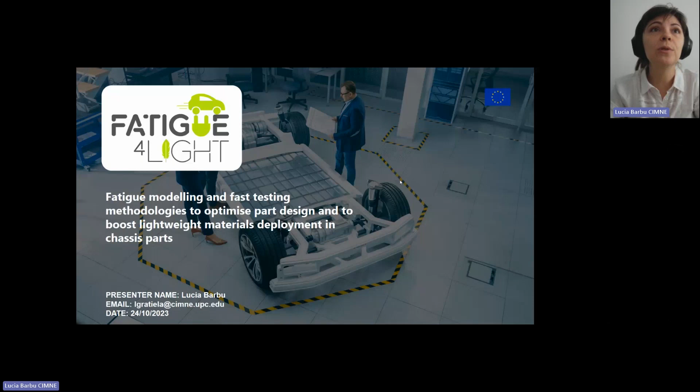As all of you know, we are here today to find out more about fatigue, and specifically in relationship to the Fatigue4Light project, which is focused on fatigue modeling and fast testing methodologies to optimize part design and to boost lightweight material deployment on chassis parts. I want to share with you several aspects of our project, among them who integrates our consortium, what are the project phases that we've been following through the development of the workflow in the project, what is the research beyond the state of the art that the Fatigue4Light project focuses on, what are the lightweight materials that we've been tackling in the Fatigue4Light project for applying on electric vehicle chassis parts. And at the end, I would say a brief overview, because the time is very short, on several results that we have achieved in the project, just to create a little bit of hype and maybe ramp up your interest, so you can join us in future events organized by the project.

Okay, so as a general overview, Fatigue4Light is a Horizon 2020 project. We've been funded by the European Commission with nearly 5 million euros to work during 3 years. We started in February 2021, and we will be finishing this next January 2024. So we are close to the end of our project.

We've done a lot of work these 3 years, and we are very happy to share that work with you today. The consortium is formed by 14 different partners. We've joined together from 4 different European countries. And the coordinator is CIMNE, the International Center for Numerical Methods in Engineering, the institution that I'm representing today in front of you.

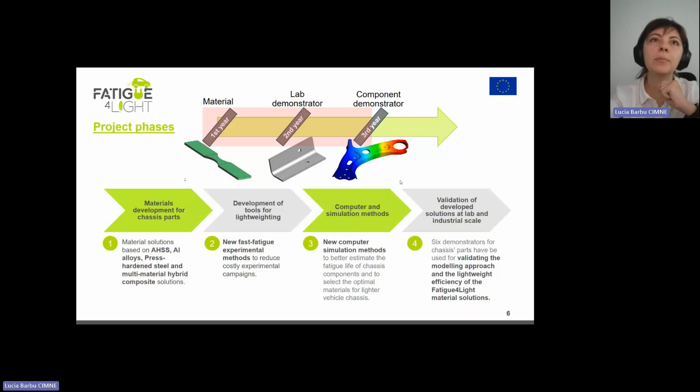And what are we doing in the Fatigue4Light project that is beyond the state of the art? Well, we have a comprehensive modeling approach where we are focusing on evaluating the fatigue performance of the different materials we have analyzed in the project. But it's not enough, as is habitually done in the state of the art in fatigue nowadays.

It's not enough to only look at the fatigue behavior if you don't analyze the whole history that material or component has passed through. What do I mean with this? When you are manufacturing a specific chassis component, there are several manufacturing processes that are going to induce some nonlinear effects on your component, on your material. And many different types of manufacturing processes can be used.

We've analyzed several of them in our project. I would say that one of the main advances beyond the state of the art is following this comprehensive approach where we monitor damage and plasticity induced due to the manufacturing process—stamping, cold forming, punching, welding—and we take into account these nonlinear effects and extrapolate them, or use them to affect the fatigue performance later on of those components manufactured in that specific way. So this is what I mean with the comprehensive approach, okay?

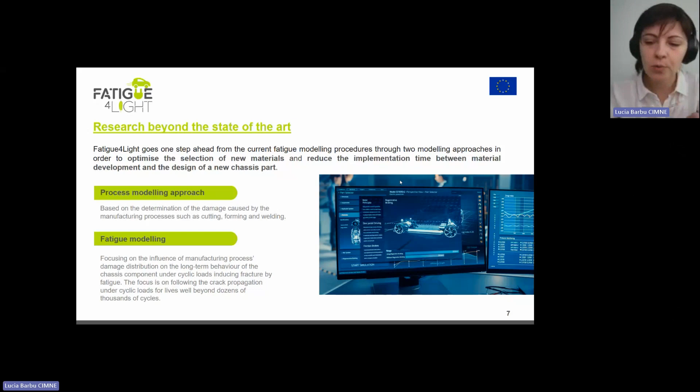Now, what are the materials that we have studied in the project? As I was mentioning, we have advanced high strength steels, basically CP800 for applications where it is not the current state of the art, and also CP980 or CP1000 for applications where we want to push forward the state of the art. They are currently manufactured with CP800, and we want to take them further to CP980.

Hybrid materials and stainless steels are also a different avenue that we've focused on in the project. This is metal composite sandwich material, where the outer layer was made of aluminum alloy and the inner core was made with glass fiber reinforced polymers. We also studied stainless steels, new martensitic stainless steel, which were adapted for press hardening. Then a different avenue has been studying advanced boron steel developed for press hardening of thick sheets. These are chassis components with quite high thickness, and these press hardened steels have good fatigue resistance, which is why we chose to study them in the project.

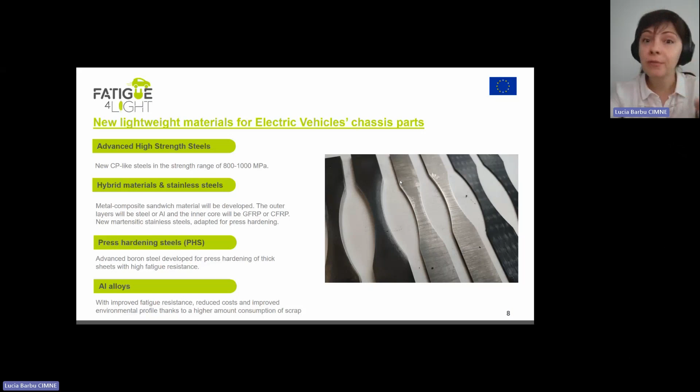And of course, aluminum alloy, as I mentioned, is involved in the hybrid solution. We chose the aluminum alloys which have improved fatigue resistance. There are some benefits when you use aluminum alloys, such as reduced cost and improved environmental profile, because they have a high content of recycled material.

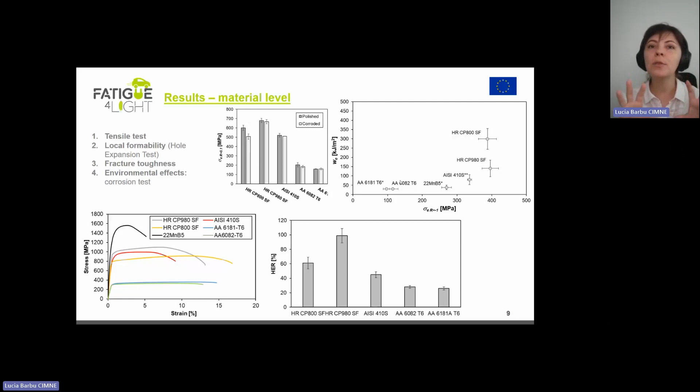Now a brief overview of the results we obtained in the project. In the first year we devoted a lot of time to a very intense experimental campaign where we compared the behavior of the different materials through different types of tests—here you can see four of them. The tensile behavior was very important for us. Local formability was also studied by means of a hole expansion test. Then we looked at the fracture toughness of the different materials and also some environmental effects studied through a corrosion test. Since I don't have a lot of time today, I just put here a snapshot of how these different materials compare in these different tests.

But I would say for us, the most important analysis was studying the fatigue behavior of the different materials in our project. We followed different avenues for studying fatigue behavior. Of course, we went through the conventional staircase method, the one that is time lengthy and cost consuming, as you know. We also studied several rapid testing methodologies, which is what you will hear about in the later part of the webinar—the self-heating method, the stiffness method, and also Politecnico di Torino did some tests on very high cycle fatigue method using an ultrasound machine.

I won't go into more detail here because my colleagues at Eurecat are going to present later on their stiffness method, and ArcelorMittal is going to present their self-heating method. So it makes no sense for me to insist here.

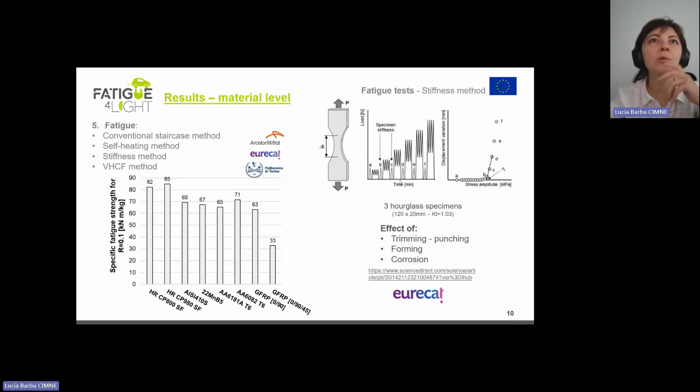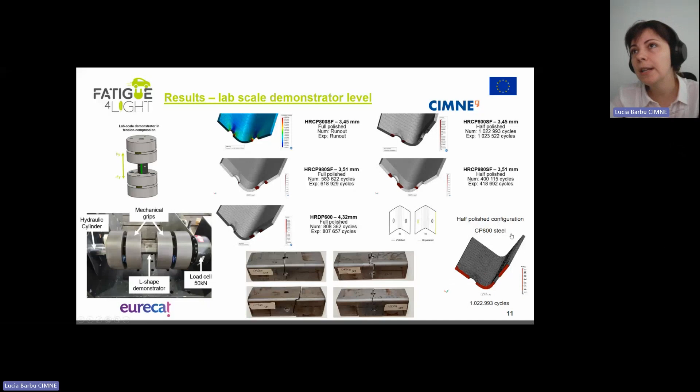Second year of the project, results at lab scale demonstrator level. We've chosen an L shape for our laboratory demonstrator. On this shape, we wanted to investigate the effect of having polished edges and polished holes throughout the whole geometry, or leaving some parts unpolished, just to study the effect of this surface treatment on the fatigue behavior. You can see here different types of fracture obtained in the laboratory by the Eurecat team, and also different types of numerical results we've obtained at CIMNE, with very good correlation between the experimental and numerical behavior. You can see a small snapshot of crack propagation for one of the profiles done in CP800 steel. Okay, let's move on.

Results at demonstrator level—here I want to speak about the steel lower control arm. We've analyzed this lower control arm geometry, and we focused in our project on three different material solutions which were interesting to explore for this geometry. One of them was a steel version, manufactured in complex phase 980, the CP980.

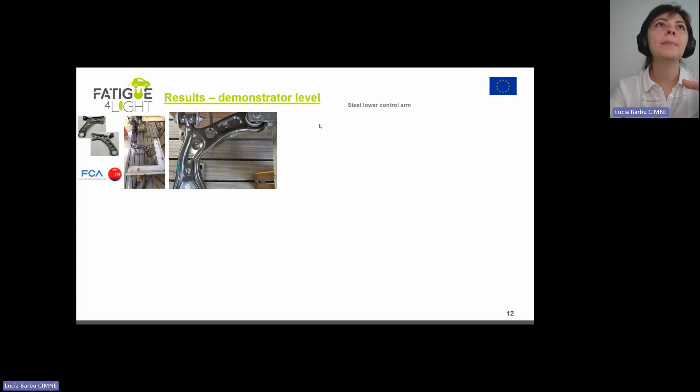Here you can see an image of the failed component under the monotonic test, and some images from the modeling campaign, both from CRF side and CIMNE side, of this misuse case, as we call it. Work for the cyclic part is in progress right now, and we will show it later if you join us in future webinars.

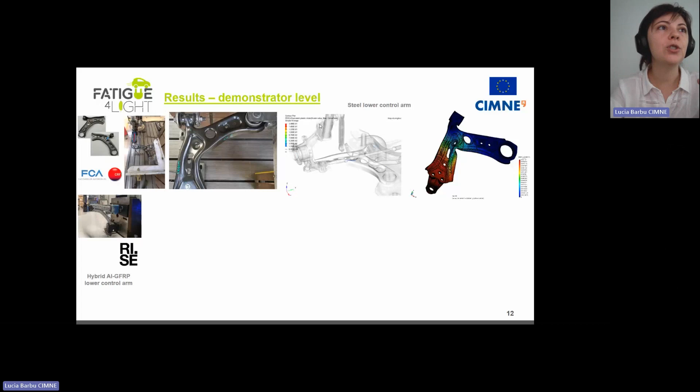Now about the hybrid aluminum GFRP lower control arm, this was a different version of this geometry. It was manufactured and tested at RISE, and you can see some images of the test being performed, and also an image of the failed specimen, again in the monotonic regime.

From CIMNE side, we were also involved, and we are continuously doing the modeling for this geometry. You can see a preliminary approximation we obtained between the numerical result and the experimental result, at least for the elastic part at this point.

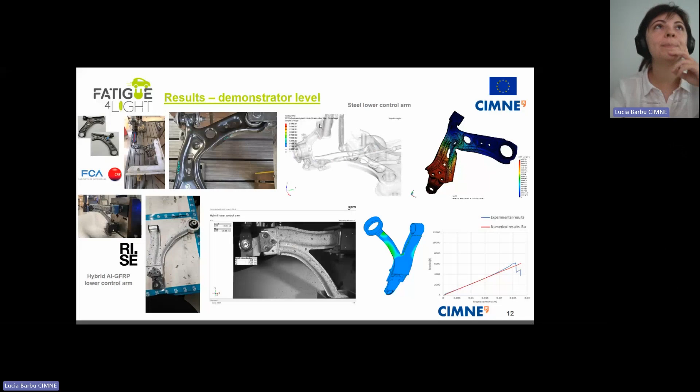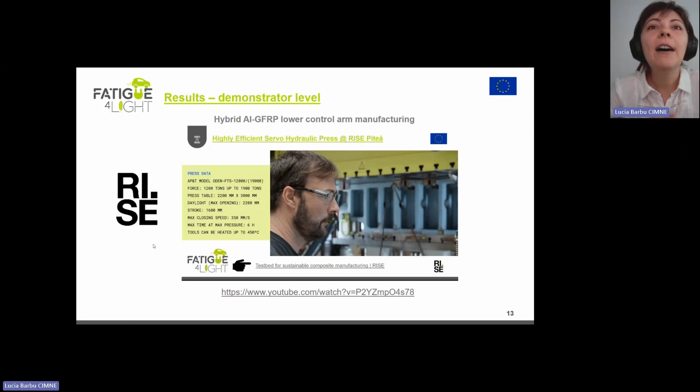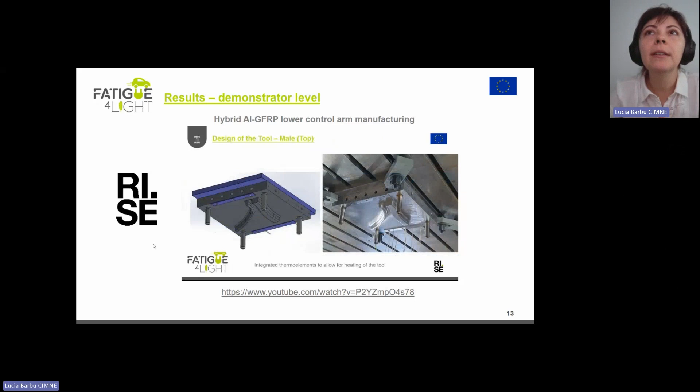I want to show you just a very quick, nice video, and you can go to YouTube and watch it, of how the hybrid arm was manufactured. This is work done by our colleagues at RISE, and it's super interesting because they created the tool also for manufacturing the component.

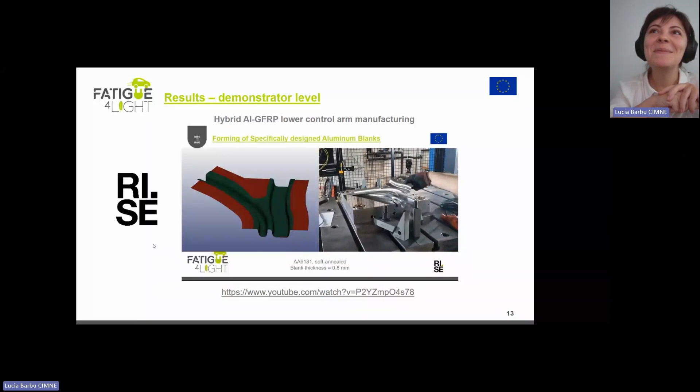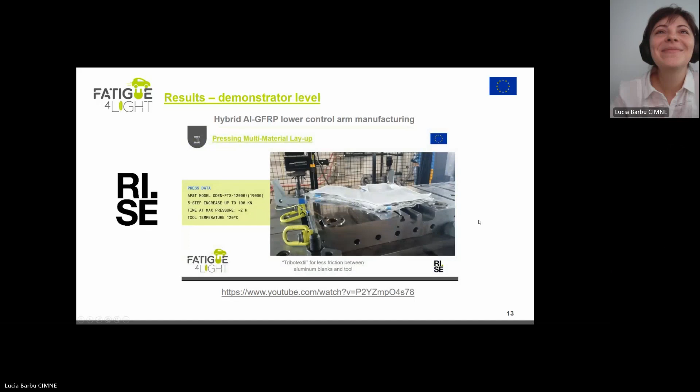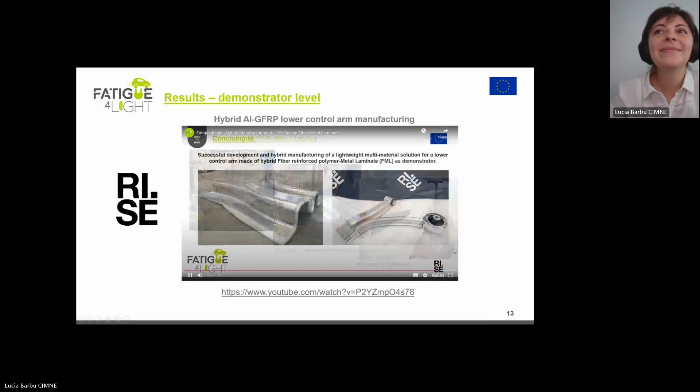At the same time with the manufacturing, there was a numerical analysis conducted to make sure everything would end up well manufactured. And this is the final view of the demonstrator, ready for testing.

Let's go fast because I don't want to lose more time. We have 2 demonstrators left in our project. One of them is the wheel, which Maxion Wheels will present later on, so I didn't dedicate any time in this presentation. The other one is the cross-member beam, which was proposed by Gestamp Hardtech.

It's a beautiful process. Now, the geometry that was manufactured with this process was later screwed to a testing bench, and some cyclic displacements in different directions were applied to this geometry.

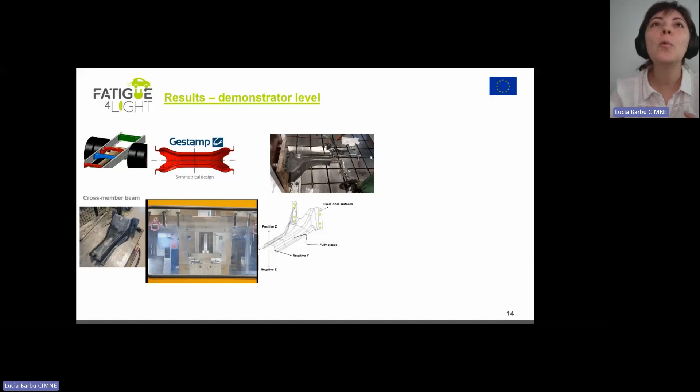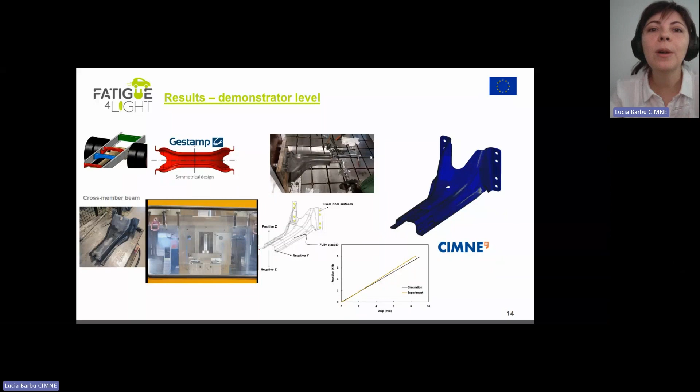From the numerical side, we've also investigated the performance of this geometry. At the moment, we are again only working on the monotonic side, with the cyclic part to be performed during this month and next month. The results are quite interesting and promising at this point.

What about the eco design assessment? A big part of the project has focused, of course, on the mechanical performance of these different materials at different scales. But eco design aspects are an integral part, a very important part of our project.

On this part, we've worked a lot to rank the performance of these different materials through different aspects: sustainability, recyclability, end of life aspects, in-use energy consumption, etc. And all of these aspects need a lot of time also to be explained.

So I won't have time today to share them with you, but I wanted to create a bit of interest. So please join us in future webinars of our project and follow us, because we will publish a lot on the results obtained in this part in the following period.

Please, Sergi, go ahead. Thank you, Danny, for the introduction. Yes, as mentioned, I will start with the first method that we developed here in the Fatigue4Light project.

Just to have an overview of the situation in electric vehicles: probably most of you already know that the weight of the electric vehicle, due to the battery, is increased by about 15 to 40%. So there is a need to reduce the weight of the electric vehicle and keep it low, as low weight means higher range and also a safer vehicle.

If we want to reduce the weight of the vehicle, there are different strategies developed for the body in white and so on, such as reducing the thickness of the material. But here in the Fatigue4Light project, as already mentioned, we address the chassis of these vehicles. The aim is to reduce the weight of the chassis by about 20 to 30%, which means 12 to 15% of the weight reduction of the structural weight of the vehicle.

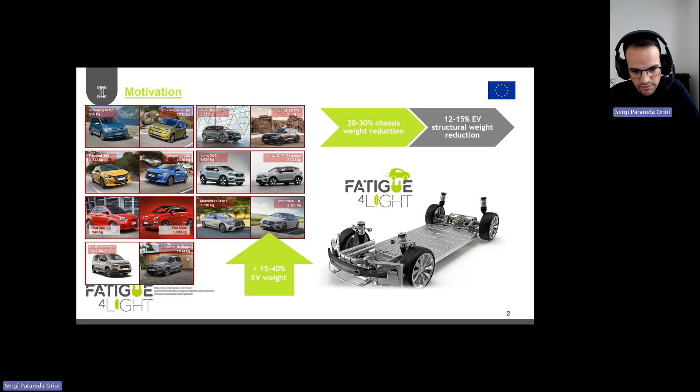But if we want to address this lightweight design, we should consider two main properties. When talking about components like the lower control arm that Lucia showed, or the chassis of heavy-duty vehicles, we have to consider the fatigue properties due to the cyclic loads applied in the chassis during utilization of the vehicle, but also, for metallic materials, we have to consider formability.

The conventional approach is to use conventional or advanced steels, but the main strategy is to move to advanced high-strength steels to obtain this lightweight design - materials with higher tensile strength, which is usually related to higher fatigue resistance, while keeping or improving the elongation of the material to obtain good formability, allowing complicated component shapes and further reducing the weight of the components and the vehicle.

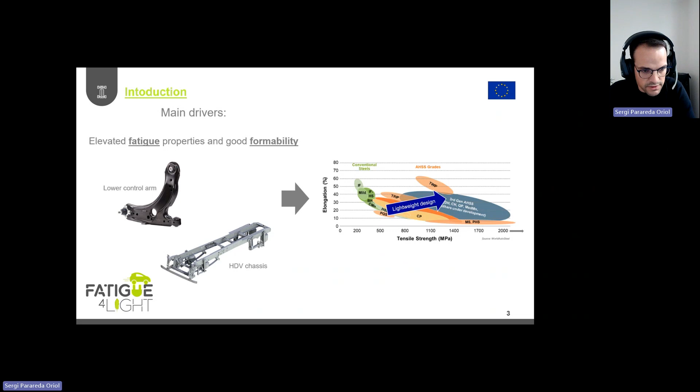But fatigue is a difficult and complicated issue, governed by the weakest link. Many different parameters can affect fatigue: the material itself, defects found on the surface due to roughness, joints, or even the component design, where stress raisers or irregularities can compromise the fatigue resistance of the component.

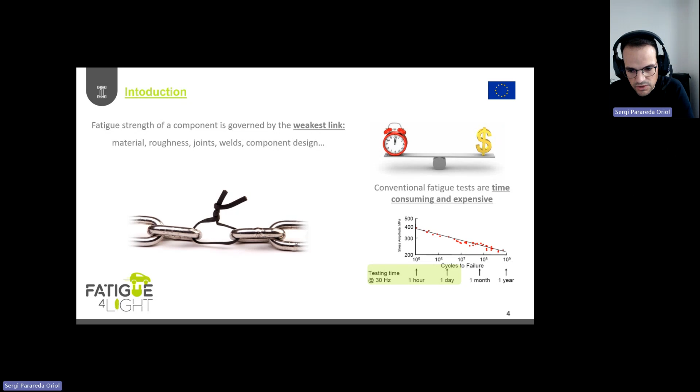So in order to properly design these components, it's interesting to characterize the material under these different conditions. But, as already mentioned, fatigue tests are time-consuming and expensive, so there is a need for new strategies to reduce the testing time.

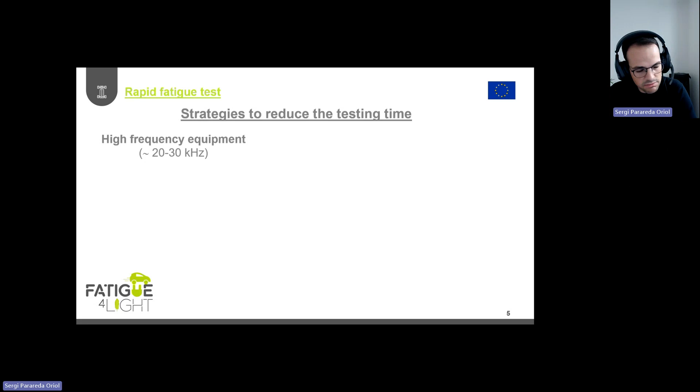As Lucia mentioned, here in the Fatigue4Light project we have two strategies. One is to use high-frequency equipment, reducing testing time by increasing the loading and unloading frequency of the specimen - in this case we can reach up to 20 to 30 kilohertz, a huge reduction in testing time. The other is to use a loading block sequence.

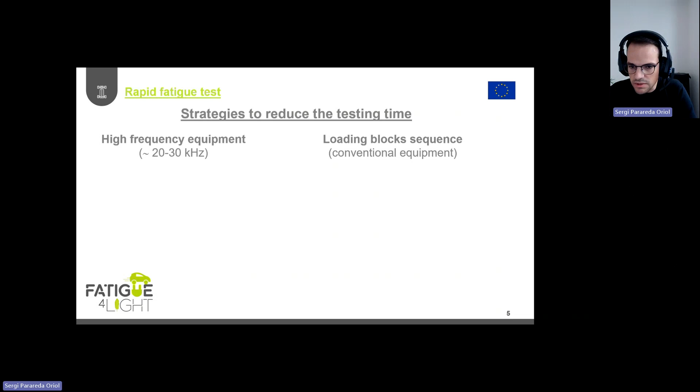The good point of these strategies is that we can use conventional equipment, such as servo-hydraulic machines common in all laboratories, along with extensometers and other common equipment. But if we want to use this new approach with loading blocks, we have to consider different points for it to be accepted and used in different labs.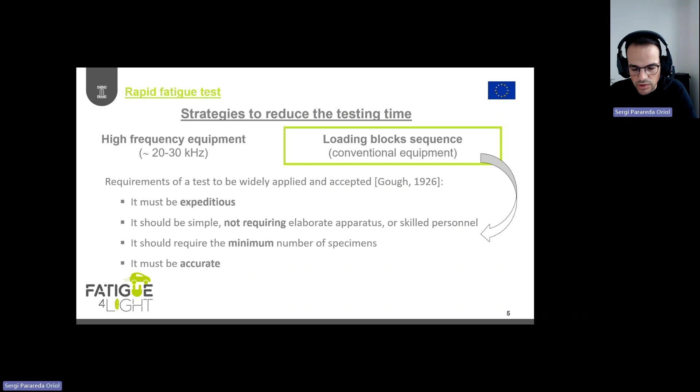As an earlier researcher mentioned, the test must be expeditious, simple, require a minimum number of specimens, and also be accurate. Keeping all of these points in mind, we developed this stiffness method here in the Fatigue4Light project.

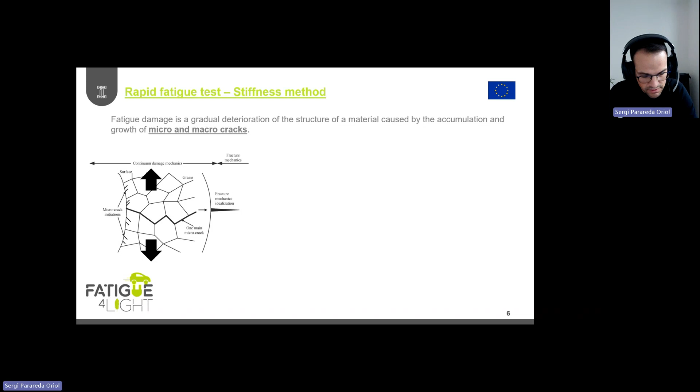The method basically tries to monitor how the damage evolves in the material, from an initial state where we have no cracks or damage, to the development and growth of micro and macro cracks. Here is a schematic graph of how the fatigue damage evolves in the material - we have micro cracks that then coalesce, forming a macro crack.

The idea is to monitor this damage evolution by measuring the strain while applying a defined load sequence, which we will see later. In this case, we can easily identify the elastic stress-strain behavior where no damage occurs due to fatigue.

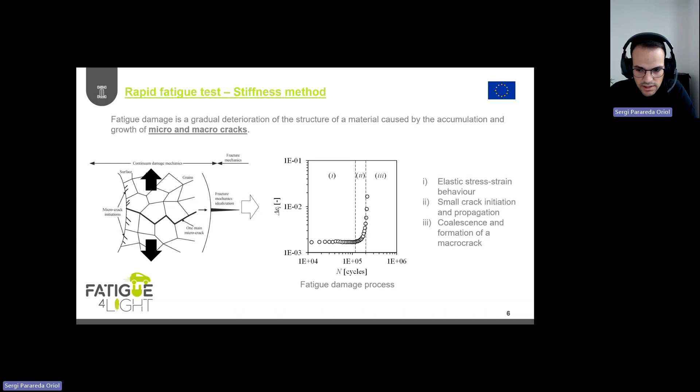Then we have this second stage where we have small crack initiation and propagation, and finally we have coalescence and formation of a macro crack. So the main idea of the stiffness method is to monitor this fatigue damage by

measuring the strain at a given or at a constant stress value. So as you can see here in the left-hand side, we are measuring the strain for a given stress, in this case, the half of the yield strength. And then we are applying some fatigue cycles, and we are measuring once again the strain for this stress level.

And then we increase the stress, the fatigue stress, and we apply more blocks. So at the end, we have, until we reach the fracture of the specimen, this evolution of the strain against the stress for each one of these fatigue blocks.

So by plotting in the right-hand side of the slide, you can see the plastic strain, which is related with fatigue damage, against the maximum stress of each one of these fatigue blocks. And in this case, we can clearly see how the strain is evolving. So the fatigue damage is evolving at a given stress value, and this stress value is the fatigue limit of the material.

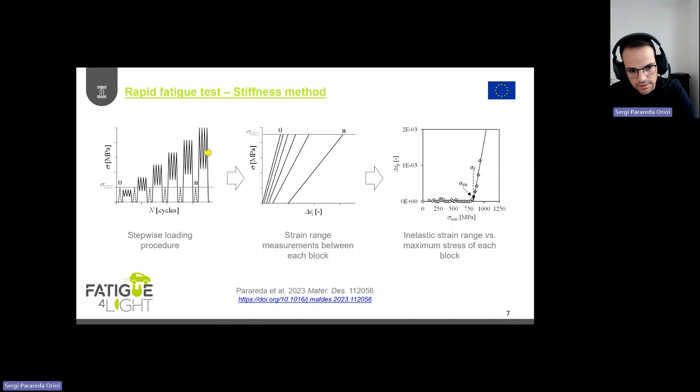So the good point is that since we are monitoring the fatigue damage, we can not only define the fatigue limit, so we can also define the slope of the SN curve. So we can obtain a complete characterization of the fatigue resistance in a short time.

So here, just to show a little bit the results, we tested 3 different materials, the dual phase material, which can be considered as a reference. And then we tested 2 CP steels, complex phase steels, the stress ratio of 0.1 by controlling the stress.

We monitored the strain by using a DIC system that you can see here in the left-hand side of the slide. We used a common load frequency of 30 Hz, so a common frequency of an SN curve, for instance, or a staircase testing, and then a block length of 6,000 cycles, so the length of each one of these fatigue blocks that you can see here in the middle of the slide.

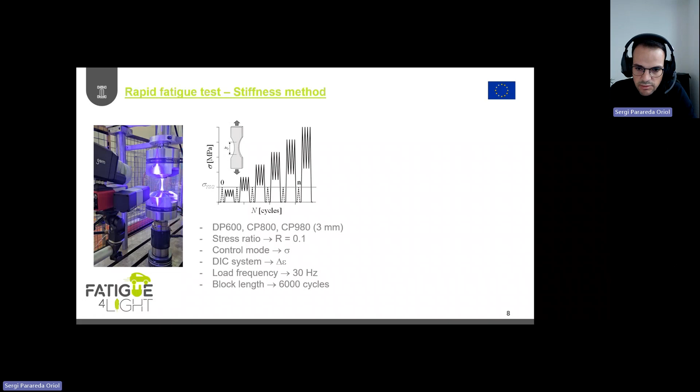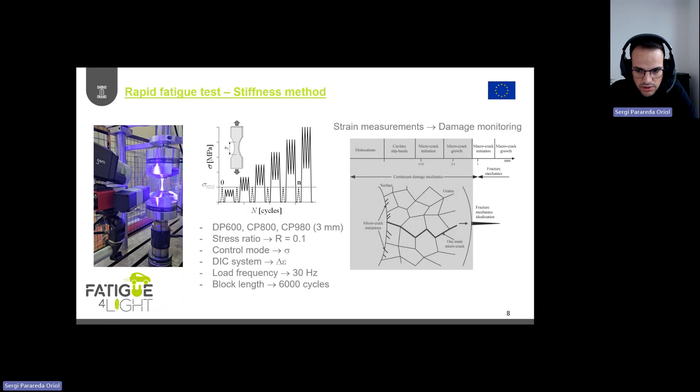And then, well, we measured it, by using this strain, we monitor the fatigue damage that is evolving in the material, and we focused on this first regime, which belongs to the continuum damage mechanics.

So here you can see some results that we obtained for these 3 materials, and also here you can see the results for different edge conditions. So when we are talking about different edge conditions, we mean that we have the hourglass specimens, for instance, and we polish the edges. So this is the polish condition.

But then also we included the trimmed condition. So we mechanically sheared the edges, and we obtained the well-known edge shape where we have different defects and so on. And we tested all of these different conditions for the different materials. The good point is that we can obtain the results in 2-3 hours per specimen.

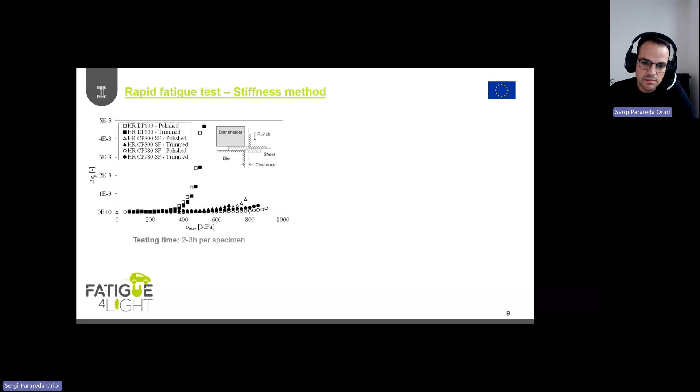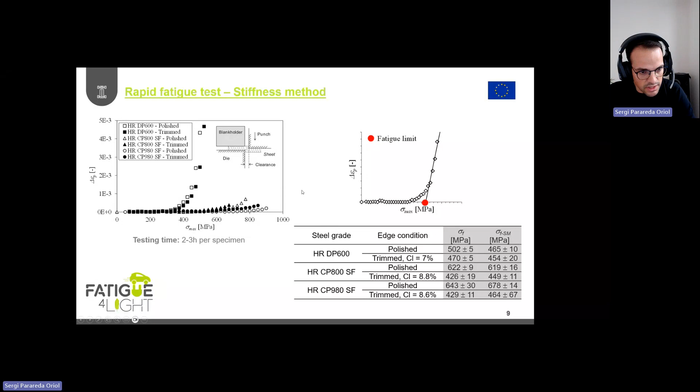So the good point, as mentioned, is that by using these methods, we can determine the fatigue resistance, the fatigue limit, but also the slope of the SN curve of different materials, but also by considering different effects. So the microstructure of the material, some defects, forming effects.

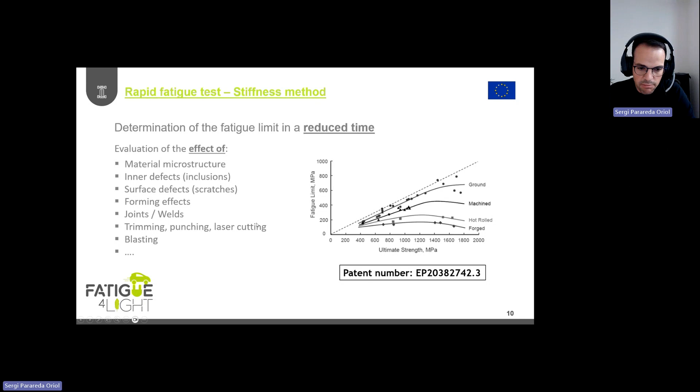We also evaluated this point of the forming effects in the project. Yes, the trimming and punching, as mentioned. And the point is that if we are able to use this technique together with other approaches, that results in an even more powerful tool.

So, for instance, here we have these 2 specimens that I showed, so that corresponds to the previous results for the polished and trimmed edges. And here what we can do is relate this different behavior to the damage tolerance of the material.

So also in the Fatigue4Light project, we developed a new approach where we can relate this reduction of fatigue with the fracture toughness of the material. So for some materials, for instance, in this case, for the DP material, the fatigue resistance for the polished and

trimmed condition was almost the same. So there was no reduction or significant reduction. So in this case, we have this KF factor close to 1. So the fatigue resistance was the same. But then for other materials, we had a higher, or a notable, let's say, fatigue strength reduction.

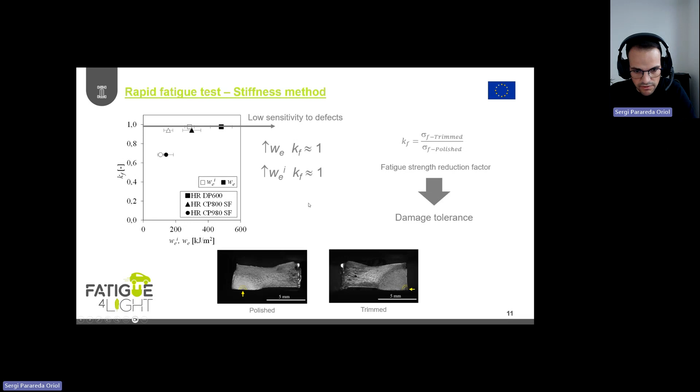And for instance, for this CP grade, this might be related with the fracture toughness of the material, since fracture toughness is related to the damage tolerance.

So here, as mentioned, this is the tool that I mentioned. Here we can plot the fatigue resistance for the polished conditions obtained by the stiffness method. We can easily obtain this data in 2 or 3 hours, and then we can also plot against the fracture toughness, which can also be obtained in a short time.

By plotting all of this data, we have a chart to select the best materials for a lightweight design of a chassis component. We define a window, let's say, for materials with high fracture toughness and good fatigue resistance. This is relevant since, when polished, everything in the lab is fine, but in the real part we have defects that can compromise the fatigue resistance of the component.

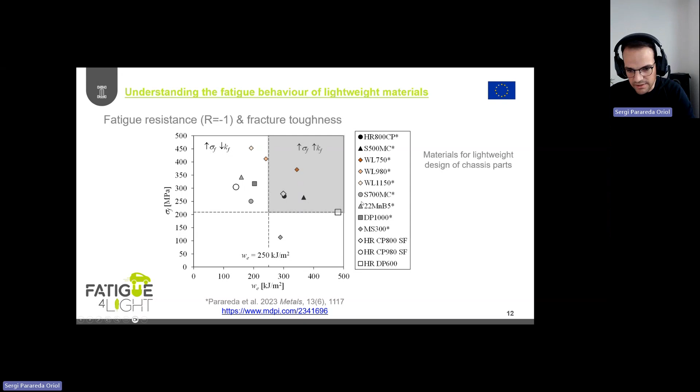And this is all from my side. Thank you very much for your attention, and I will be happy to answer questions afterwards. Thank you.

Yeah, I think you can see my screen. Thank you for the introduction. Sergi made a short presentation, an introduction to fast testing methodology, and today I wanted to focus on self-heating measurements.

Surprisingly, it's not something new. This method has been developed more than a century ago. During cyclic loading, Stromeyer observed that during fatigue testing there was an increase of temperature under cyclic loading. He determined, with a device he developed specifically for the test, that the temperature elevation was directly linked to the appearance of fatigue. So the self-heating measurement was born.

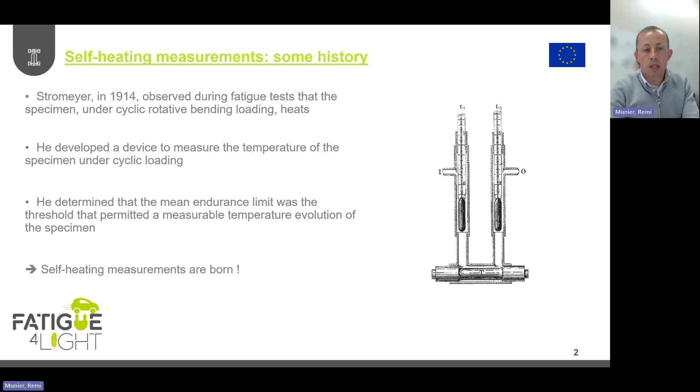Then the idea is to measure during the test the temperature evolution of the specimen under cyclic loading, just as Stromeyer did more than a century ago. And then the idea is to directly link this temperature evolution to the fatigue properties.

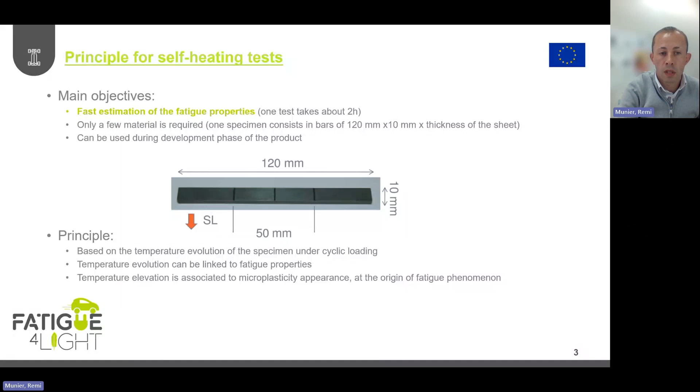For one test, the configuration uses 1 specimen, and we need 3 thermocouples. 2 are fixed on the grips of the servo-hydraulic machine, just to measure the temperature evolution of the system and of the environment during the tests. And then 1 thermocouple is fixed on the specimen.

As we are performing self-heating tests at a load ratio of -1, we need an anti-buckling device to avoid buckling under compressive load. According to the geometry of the sample, where we can consider that the temperature is quite homogeneous in the useful area, we can reduce the 3D heat conduction equation to only 1 adimensional 0D heat conduction equation, directly linked with the temperature evolution of the specimen, and with ED, a term devoted to the appearance of microplasticity, and then to fatigue properties. So we can directly link these 2 parameters: the temperature evolution and the dissipated energy at the origin of fatigue phenomena.

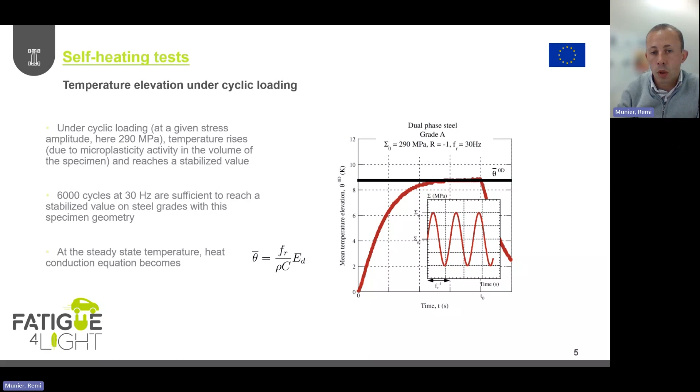Then the principle of the test under cyclic loading: here you can consider only one cyclic loading at a loading frequency, quite the same conditions that Sergi is using for the stiffness method, a frequency of 30 Hz, a load ratio of -1. Then we can observe during cyclic loading a progressive elevation of the temperature up to a stabilized temperature, which is measured for each cycle.

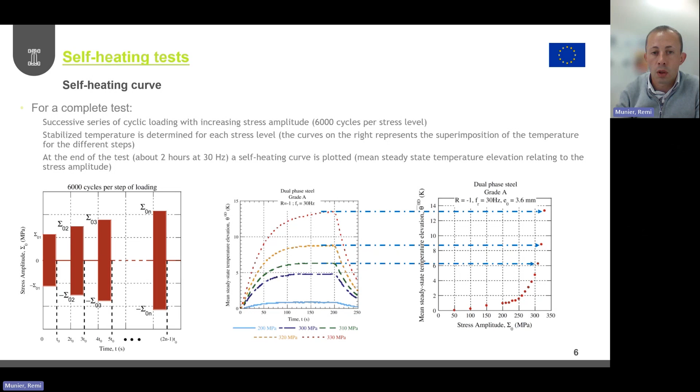And then we measure the stabilized temperature, which permits us to plot, on the right, what is called a self-heating curve, representing the evolution of the temperature of the specimen according to the stress amplitude. Okay, so we have one curve. So what can we do with this curve?

First, as Stromeyer used more than a century ago, the idea is to use some kind of deterministic approach to determine an estimation of the mean endurance limit at 2 million cycles. Here we consider for the test that the intersection between the axis and a straight line, taken as an asymptotic behavior of the self-heating curve, is the mean endurance limit. Over the years, we have tested many metallic materials, many aluminum alloys, and we know the method is quite accurate for these grades, but only a few composites have been tested.

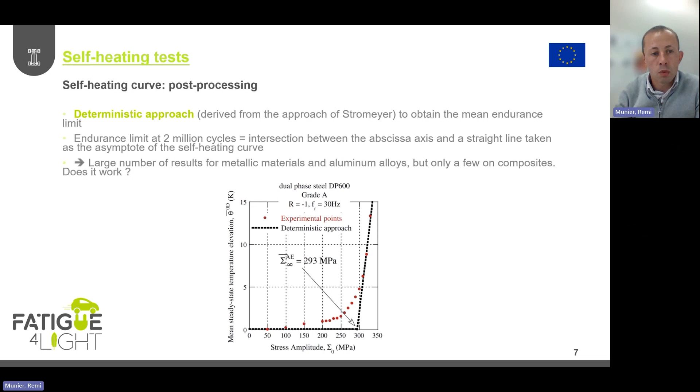So one of the ideas also was to test if this method was relevant. Then for a second approach, we can use a probabilistic model, because as we know, fatigue is a dispersive phenomenon. Having information about the endurance limit is good, but we also need an estimation of the standard deviation according to fatigue tests.

So for metallic materials, we developed a two-scale probabilistic model representing a progressive appearance of microplasticity. Then we can completely describe a self-heating curve for low regimes of temperature and then for high regimes. So the temperature evolution of the specimen can be decomposed into two contributions: one not linked to fatigue properties, at low stress amplitude, and one directly linked to the evolution of microplasticity inside the volume.

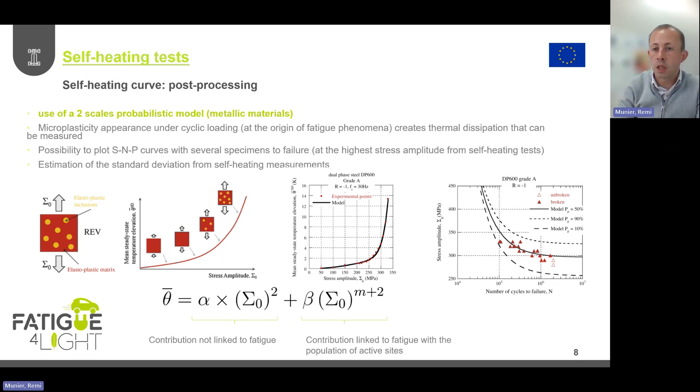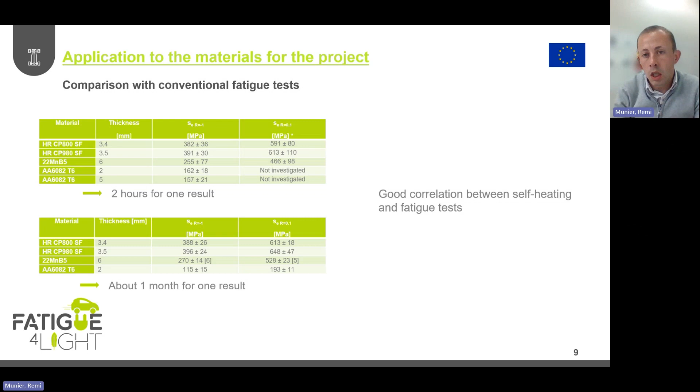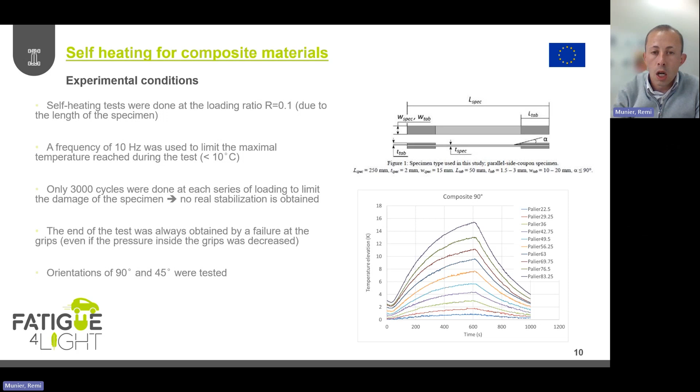There was a need to change a bit the conditions for the test, to reduce the frequency, just to be able to not overheat the specimen. We also needed to reduce the number of cycles to reduce the damage on the same specimens, but then we were able to obtain one self-heating curve, which is quite strange here in the results.

I showed before that the temperature evolution could be a contribution of two regimes. For composite materials, only one is observed. It's always a power of 2 of the maximal stress according to self-heating measurements. But as for metallic materials, we asked, why not use the same empirical approach to determine what could be considered an endurance limit, dedicated to the progressive appearance of the temperature?

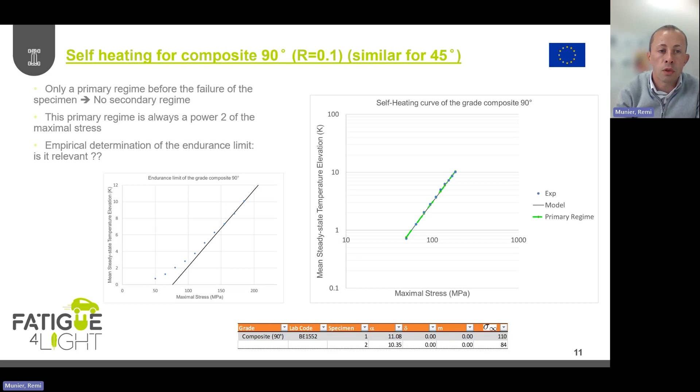So is it relevant, right? Because here, even if we don't have a secondary regime linked to fatigue properties - since fatigue properties are not similar, it's not the same model, we cannot use the same approximations - you can see on the right, in the middle of the table, and then on the bottom with the left column, that fatigue is quite relevant with the progressive evolution of the temperature. And that's despite the fact that the model is not fully appropriate, because here we can consider only one regime.

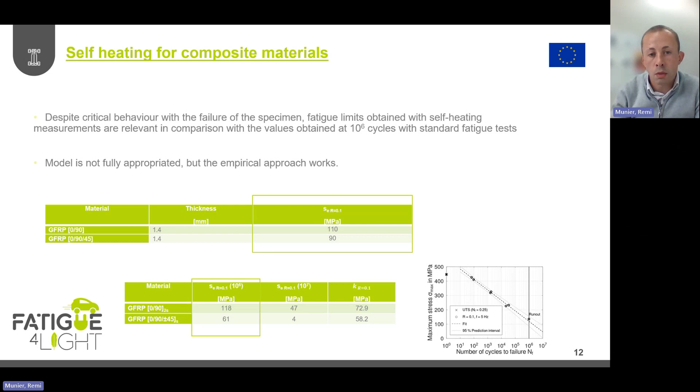But here for composite materials, as we can deal with the weakest link theory, we know that when one fiber breaks, it will cause the failure of the entire specimen, and here it's what's occurring with a limitation of the value. So we can have good results for one orientation of the fiber. For the other one, there was an increased error, but we can say that this method, as a first attempt, was quite relevant also for composite materials.

To conclude, self-heating was used for the rapid determination of the endurance limit. One of the biggest advantages of the method is the reduced time compared with conventional fatigue tests. As I said before, there can be some mistakes and limitations, but for bare materials with a homogeneous volume, this approximation is quite good.

Especially for metallic materials across a wide range of ultimate tensile strengths, there is also good agreement for aluminum alloys, even at a loading ratio of -1. The estimation of the mean endurance limit is quite good, and we also have an estimation of the standard deviation.

This is a good thing in terms of fatigue design for the model. We also tested composite materials, and we showed there was only one primary regime. When there is progressive appearance of microplasticity, it directly leads to failure of the specimen, and the estimation is quite good also for the mean endurance limit.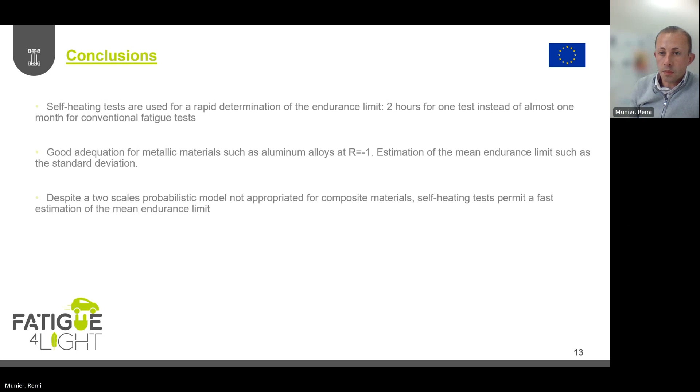I haven't presented the result here, but when we compare the self-heating method with the stiffness method for CRG, we get quite similar results. Okay, I think that's it for my presentation.

A brief introduction of MW. MW is a division of CLN Group, and it is a steel wheel maker, leader in the sector for passenger car and light commercial vehicle. MW's contribution to the project, Fatigue4Light, is to study high-strength steel in order to improve the fatigue performance of the wheel.

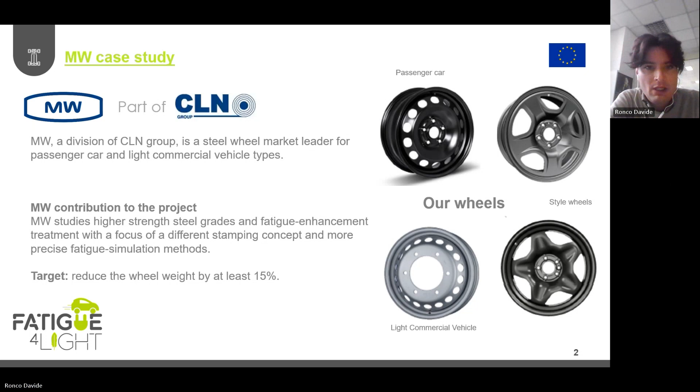The target is to reduce the wheel weight by 15%. What was the MW strategy for this European project? At the beginning, we made a pre-screening fatigue test in order to evaluate which material can be suitable for our needs.

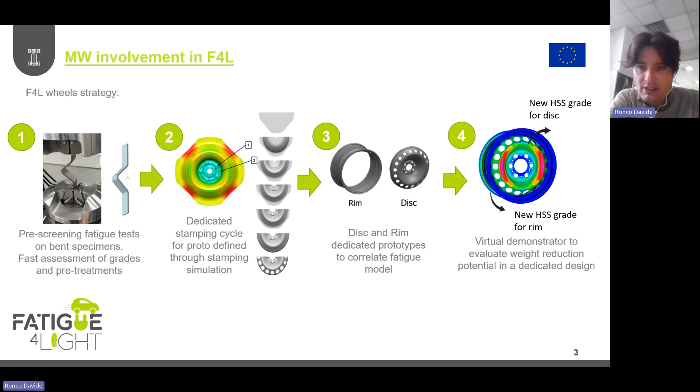When we defined the correct material, we studied dedicated stamping cycles and a dedicated stamping sequence to produce parts with this new material grade. We prepared the samples and prototypes, and correlated the fatigue model. Then at the end, we created a virtual demonstrator with all the concepts and characteristics we studied during the Fatigue4Light project, including this innovation, with the scope to reduce the wheel weight by 15%.

At the beginning, as I said, we studied the material on specimens. We started from the flat specimen. Here in the picture is not exactly the specimen we used, just to show the difference between the first type and the specimen we used, this 'dogbone' specimen.

We studied the fatigue performance of DP600 material, which is the material we normally use for the wheel, and also other materials: HSLA700, DP800, and CP800. Then we reproduced the fatigue test with this special specimen.

This special specimen has two important features. First, it is bent, so inside the specimen we include also the hardening phenomena we have, for example, when we stamp the wheel. We also convert the stress from pure traction and compression stress, as in the flat specimen, into a bending stress, which is what we have in the fatigue test on the wheel.

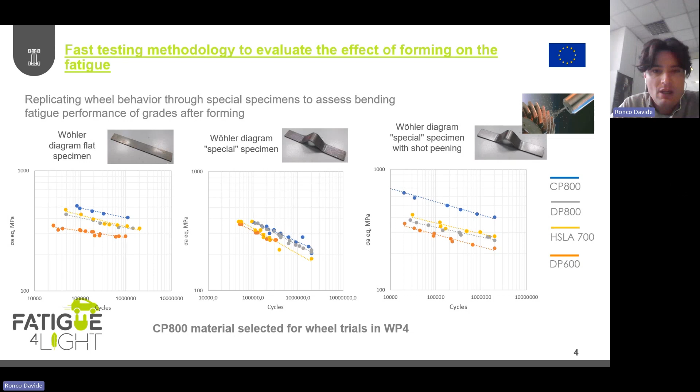After this test, we selected the CP800 material as the new material to start with, instead of DP600. Sorry. Okay.

This part we selected two different case studies. The first reference is for the disk, the internal part. Usually this wheel has a disk of 4.3 millimeter DP600, and we produced some samples with 3.7 millimeter CP800.

The second case study is for the rim, the external part. Usually this part in that wheel is 3.5 millimeter, and we pass to 3 millimeter CP800.

After the case study definition, we performed the stamping simulation in order to identify the better sequence to stamp the CP800, because its characteristics compared to the DP600 are different. We created a dedicated tool, and in our plant in Romania, we produced the parts in different campaigns.

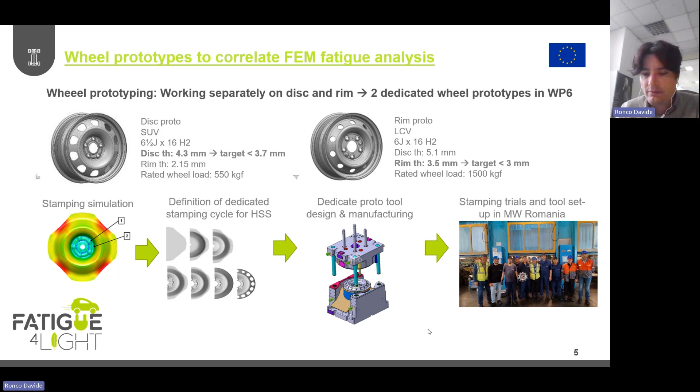This permits us to reach the goal, because we have a solution that is 0.6 millimeter less in thickness, reducing the disk weight by 15%, giving us a lighter solution.

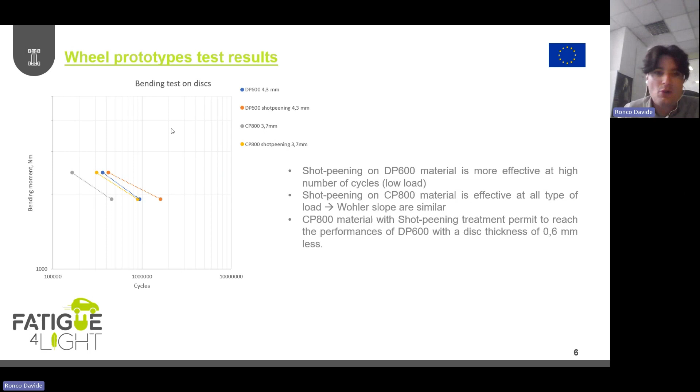After the disk, we tested also the rim. The tests for the rim are not yet finished 100%. In any case, on the rim the situation is a little bit different: the 3 millimeter CP800 compared to our normal rim in S235 JR has lower performance.

But we can say that with this material, we cannot reduce the weight and thickness by 15%, but by 7.5%.

One thing I would like to add is that these tests were done without shot peening. For the moment, shot peening on the rim was not investigated. So probably with shot peening, the performance can increase, and we can reach also for the rim the 15%.

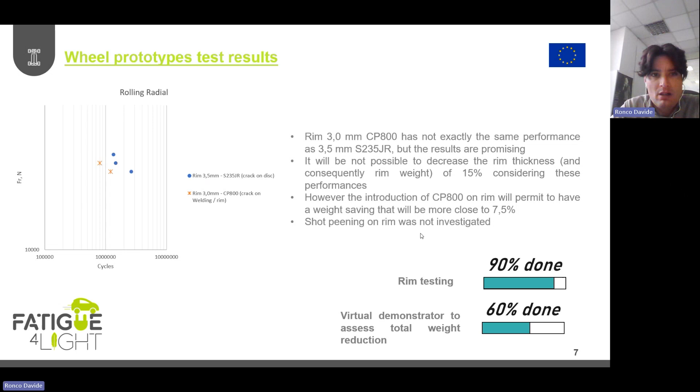Concluding, the target for this application: we identified this new material, a new application on the wheel for the light commercial vehicle, because usually the light commercial vehicle has higher load and so higher thickness of disc and rim.

With the CP800, we can reduce the weight, and consequently also the CO2. We can keep a competitive price and low cost of ownership, and the light commercial vehicle usually hasn't particular requirements in terms of NVH or stiffness. So the comfort compared to the passenger car is a little bit less important, and this is the reason why we can decrease the thickness of disc and rim for that type of wheel.

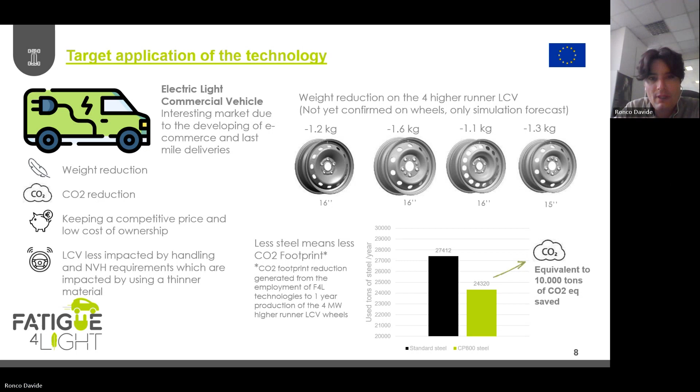So from my side, that's all. Thank you.